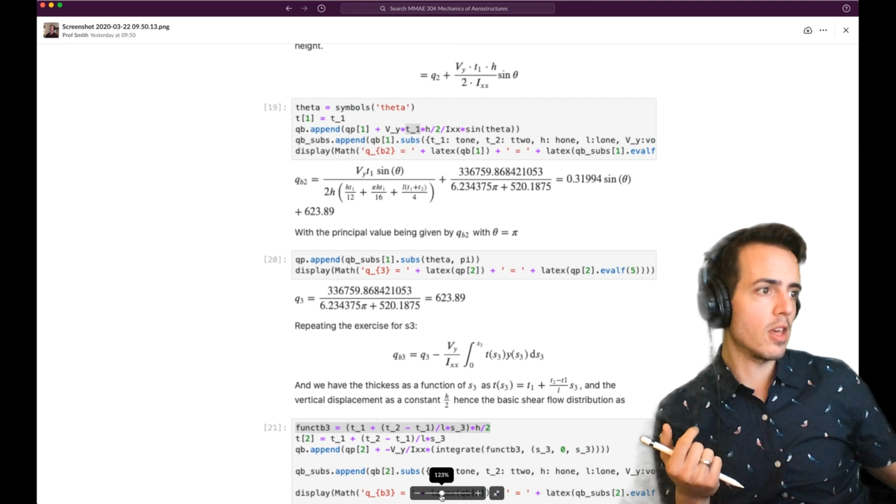Mr. Tilker also asked some questions, and after I suggested where I thought his mistake was, he was able to spot it himself. It's useful to have this online because when someone like Mr. Tilker has a question, it will likely pique the interest of others who didn't realize they had the same issue.

If you haven't joined already, I think we've got 49 people on the Slack site, and I believe only slightly above 50 are enrolled in the course, so that's a really good showing. I thought I'd put up a more professional profile picture, but no, I still have the original one. I'll try to update it occasionally to reflect my state of mind based on the number of emails I get.

Let's go back to the notes now.

Slack's being used really well. Please, if you've got a question, try to put it in there. I've also seen that some students are using it to help each other out and find the videos.

I just saw Mr. White asked a question, so I'll answer it straight away. Going back to Slack - this is where it's useful. His question: for the shear center calculation, when providing the answer to the shear flow distributions, is it okay to leave Q2 as a function of theta instead of a function of S2? I'll reply directly here and start a thread.

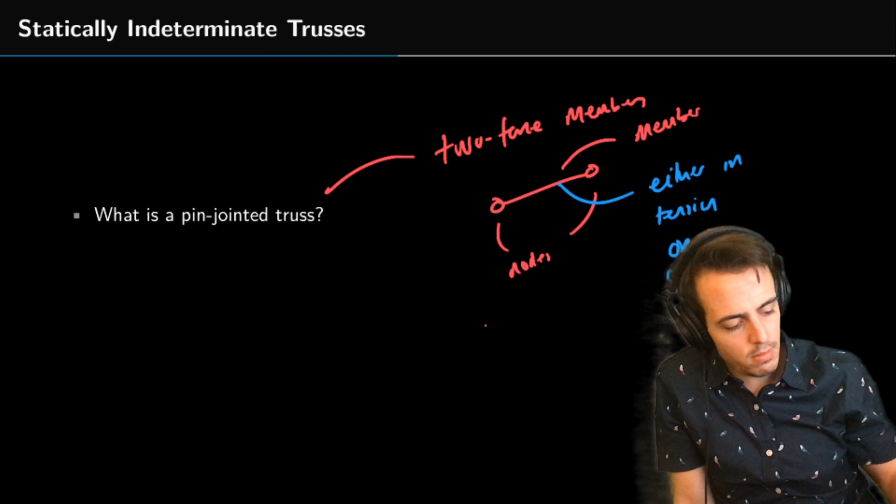So pin jointed trusses are comprising 2 force members. We've got a member between two pins here, or two nodes, and we've got a member between it. Now what this means is this member can only take force along its principal axis - it can either be in tension or compression. The sign convention we use in this course is that tension is positive and compression is negative.

So that's what a pin jointed truss is. Now we've gone through examples of lots of those in class. I'm just going to move myself away off this screen. Actually, no, I'm not going to bother. I'm going to move on.

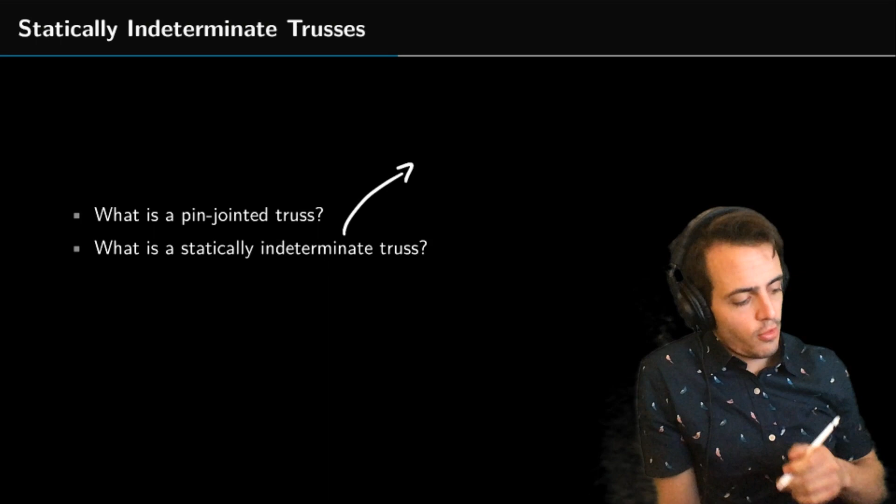So statically indeterminate - what is a statically indeterminate truss? We have a calculation that we do whenever we're looking at a truss frame. We've got three parameters we remember: M, which is the number of members; J, which is the number of joints; and R, which is the number of unknown reactions.

So we can tell immediately that if we've got more than 3 unknown reactions, so if we've got 4 unknown reactions, we can't solve this structure - we can't solve it from static equations on its own. So if R is greater than 3, this is externally statically indeterminate.

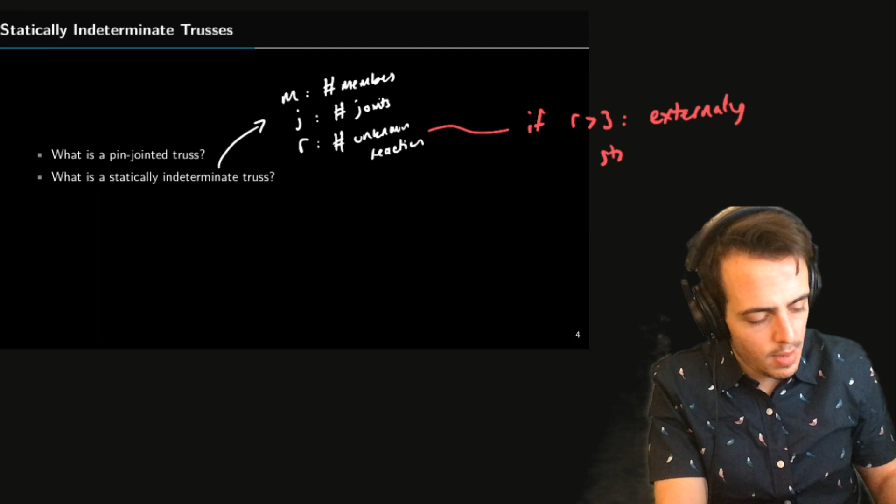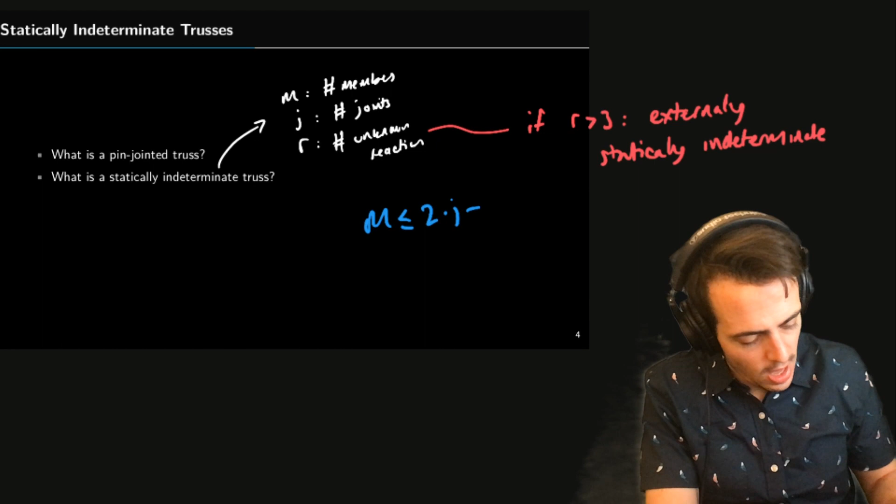Okay, and then if we have R equal to 3 or less, then we can determine whether it is statically indeterminate or not, because we can then look at the equation M is less than or equal to 2 multiplied by J minus R. This is the equation that tells us whether we are statically determinate or not.

So if M is larger than 2J minus R - say if M minus 2J minus R is equal to 1 - then we would have degree of indeterminacy equal to 1. Now this would tell us, in this case, if we'd gone through our truss frame and found out in the first place R was equal to 3, and secondly the degree of indeterminacy was equal to 1, the first step tells us that it's externally determinate.

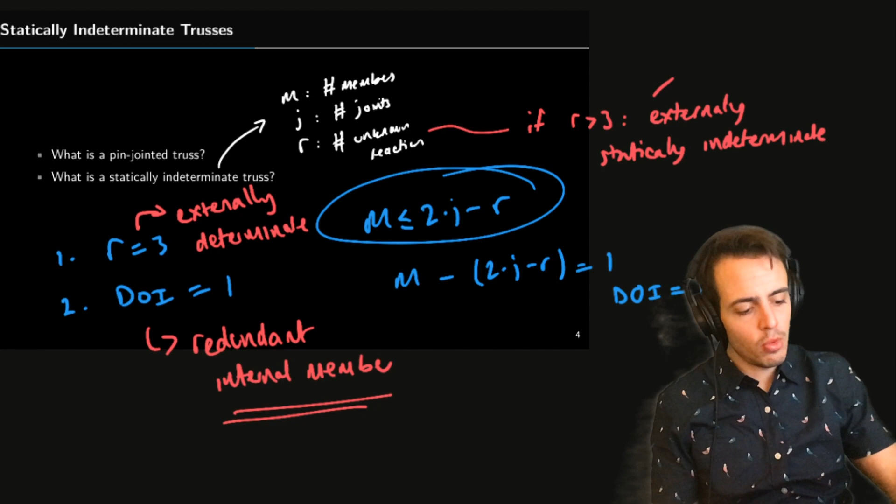And what that tells us is that we could draw a free body diagram and determine what all of the reaction forces are. The second part tells us that there is a redundant internal member. So in either of these cases, we've either got a redundant internal member or we've got a redundant reaction.

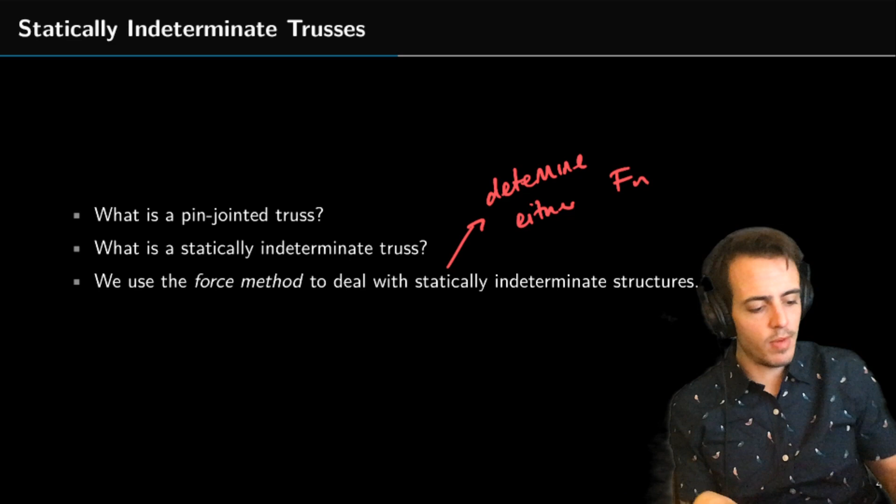Now in both of those cases, we need to use the force method to determine either the force in that member or the redundant reaction, and then we continue with the problem just as we would have done from 200 or 202. So we use the force method with statically indeterminate structures, and this helps us determine either Fn, which is our redundant reaction, or Fi, which is our internal force.

The redundant internal force.

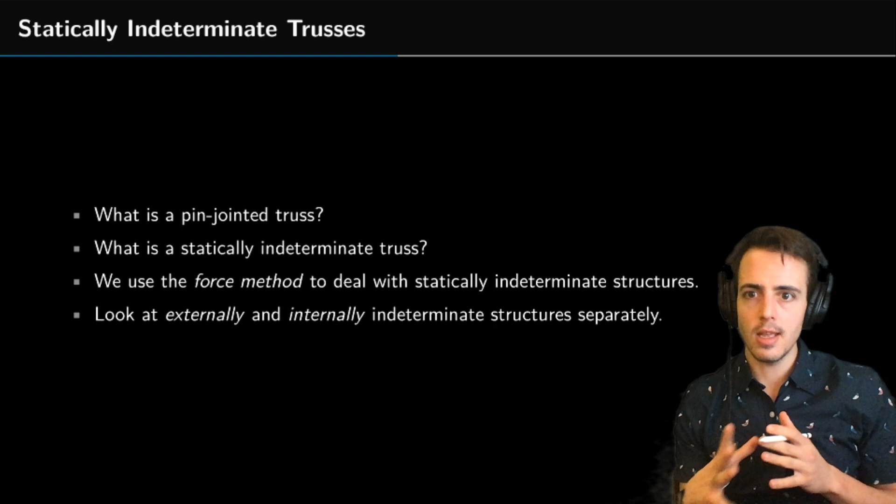We spent a lot of time looking at these two things separately, because even though ultimately we're solving the same problem when looking at an internal or externally statically indeterminate structure, we'll look at these two things separately. It's easier to look at externally indeterminate structures first, so we'll describe what we're doing with the force method. We're not yet looking at work energy, virtual work, or unit work method—just how the force method works. I want you to understand the problem we're trying to solve, and hopefully it will become apparent why using the work energy or virtual work method helps us solve this.

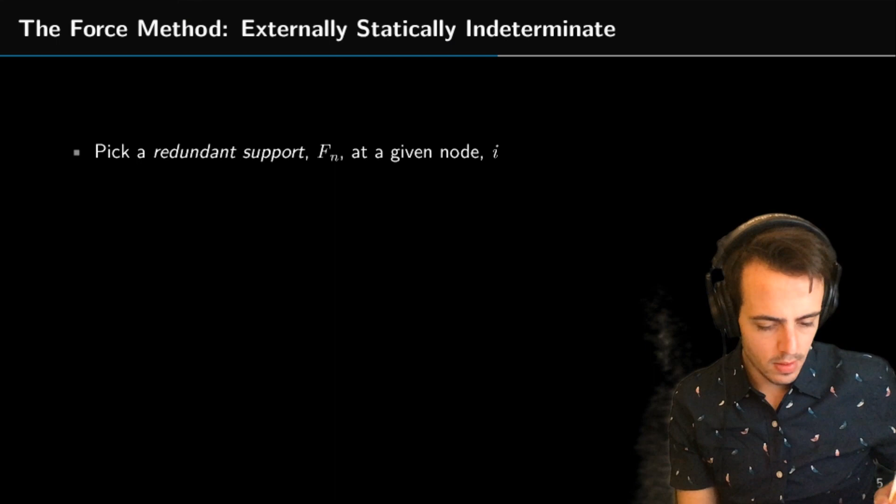So let's pick a problem, one that we've gone through before in class. Say we have this truss structure here. Let's zoom in a little bit, and I'll make this slightly smaller so I'm not going over my text.

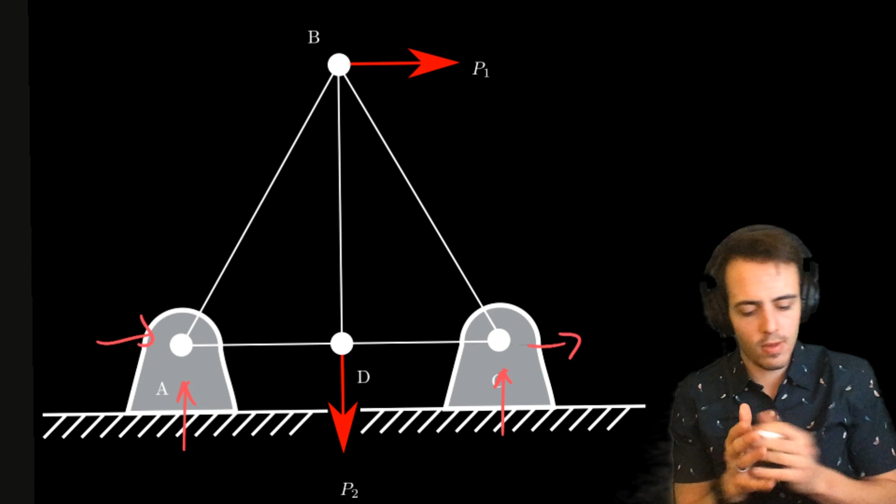Before we follow the steps listed, let's look at this problem and do our calculation. We've got two built-in supports, one down here and one over here, both of which have two reactions. So I've got RAX and RAY, and RCX and RCY.

That tells me I've got 4 unknown reactions already. R is equal to 4, therefore we are externally statically indeterminate.

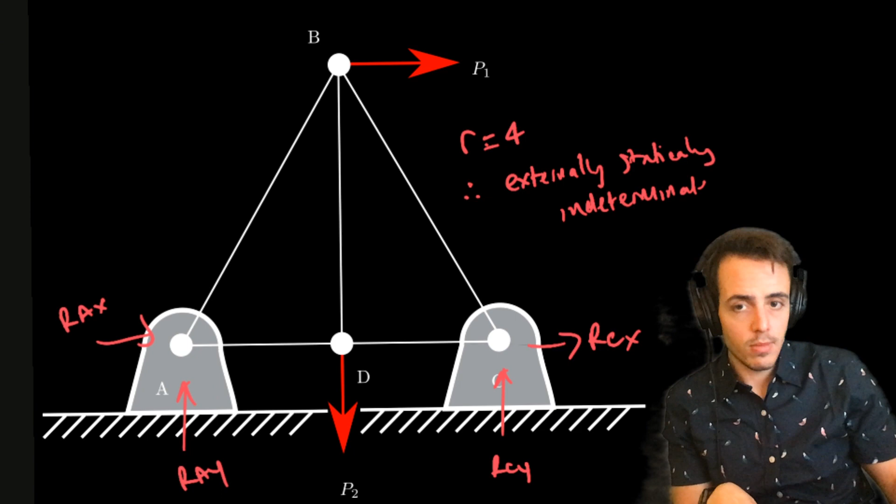Now we can also check the degree of indeterminacy of this structure. If it's 1, that's good, because we know we have a single redundant reaction, telling us we don't need to get rid of any internal members. If it's greater than 1, that would tell us that in addition to removing one reaction, we'd also have to get rid of an internal support.

Okay, so Mr. White has just thanked me—that was a nice noise in my ear. He said not just thank you, but 'awesome, thanks.' So it's good to know. I'm not making fun of you, Henry, it's just very weird speaking into a camera and seeing student responses as I'm going on.

Anyway, back to this problem. We can work out what else we've got here in terms of members: 1, 2, 3, 4, 5 members, so M is equal to 5. And looking at the number of joints, we've got 1, 2, 3, 4 joints, so J is equal to 4.

So our equation: M has got to be less than or equal to 2J minus R. That is 5 is less than or equal to 8 minus 4, so 5 is less than or equal to 4. We can see here that equation is off by 1, so our degree of indeterminacy is 1 for this structure.

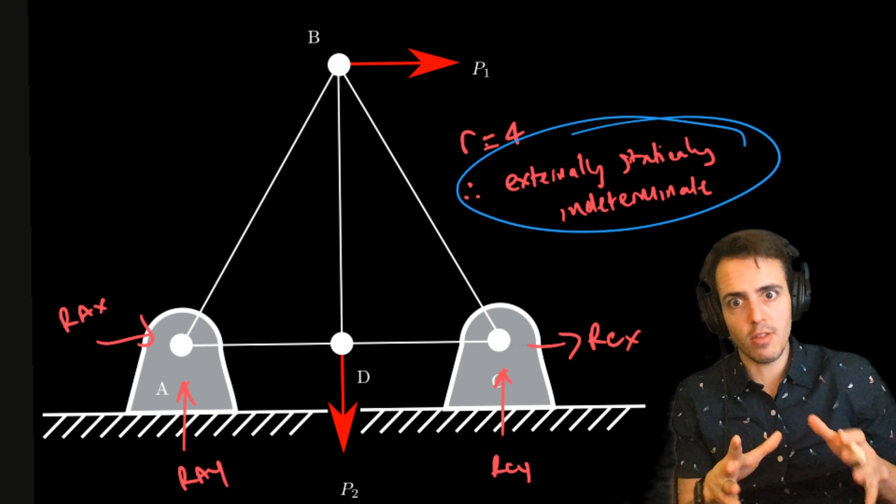We can see that for this structure, if we've got 4, we can't determine what each of those reactions is based upon the static equilibrium equations. So it means one of them is redundant, and if we get rid of it, we could still have a structure maintaining equilibrium without it.

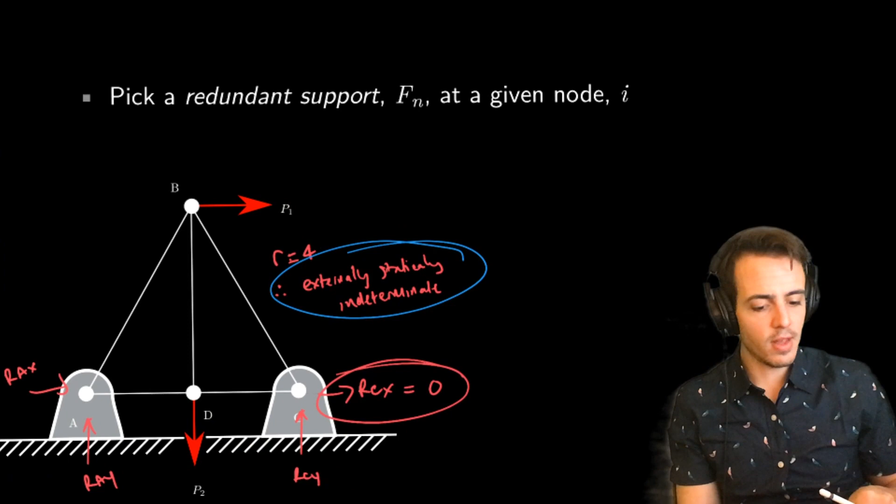Just for the sake of this question, and because I've drawn all the diagrams already, we'll get rid of RCX—we'll set this one equal to 0 first. This is effectively what I'm being asked: pick a redundant support Fn at a given node i. So the ith node in this case, i was equal to C, and I've chosen Fx. So what I'm getting rid of is Fcx in this case—I'm setting that to be my redundant reaction.

So then we're now going to see how much the structure moves if I set that equal to 0. And this is going to give me the quantity big delta I. So let's introduce the next diagram.

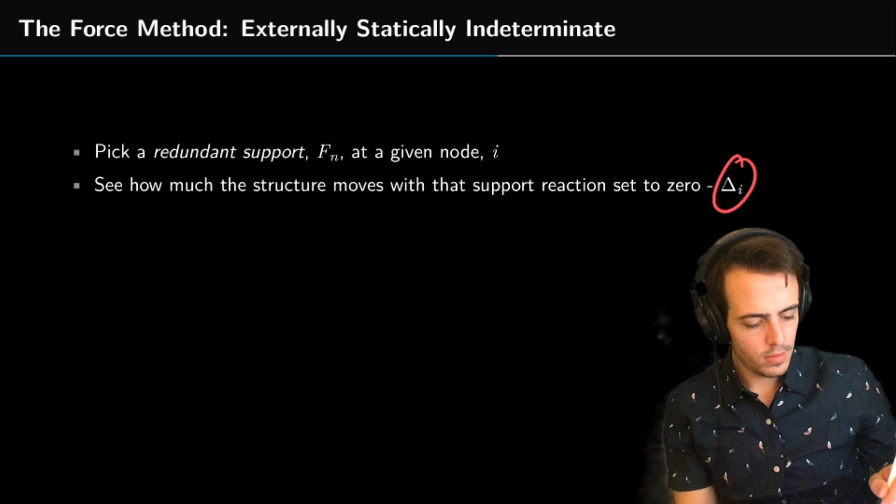Okay, so if I set that reaction equal to 0, what I have effectively done then is I have taken this structure, and I've taken what was a built-in support, and I've turned it into a roller.

I've got to figure out how to get a decent black background on these slides, or get my LaTeX slides to match the background of this other program, because that's annoying how there's that line there. I'll try and get that fixed.

So we've turned our built-in support into a roller now, and this means that if we apply these two forces here, pulling down and pulling across, the structure's probably going to move in this direction. So we're seeing how much the structure moves with that support reaction set to 0.

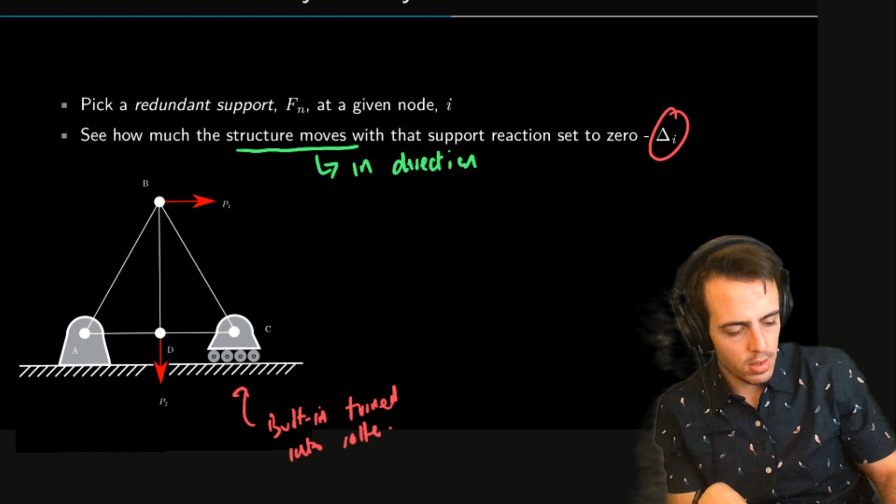There's an important distinction to make here. We're seeing how much the structure moves in the direction that that reaction was.

I'm not telling you how to do that yet. We're going to go through that in the coming lectures. I'm just telling you the distinction in the force method. So let's put our next one in.

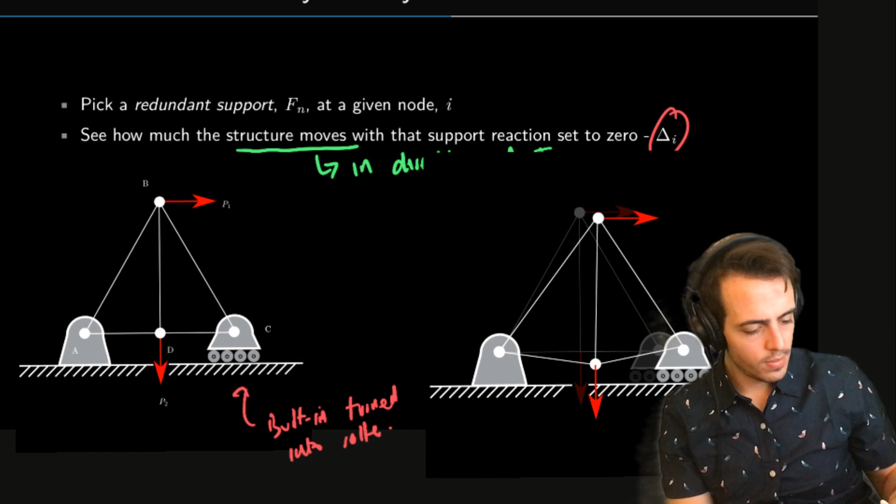So if we then load our structure, we can see that it's moved a certain amount. I've got the original structure in the light grey, and I've got the new structure in the white.

I think my wife's getting phone calls in the background and doing her very best to not answer them.

Bless her. So we've loaded the structure. Now we remember that our reaction that I put over here, this was Fcx, was equal to 0.

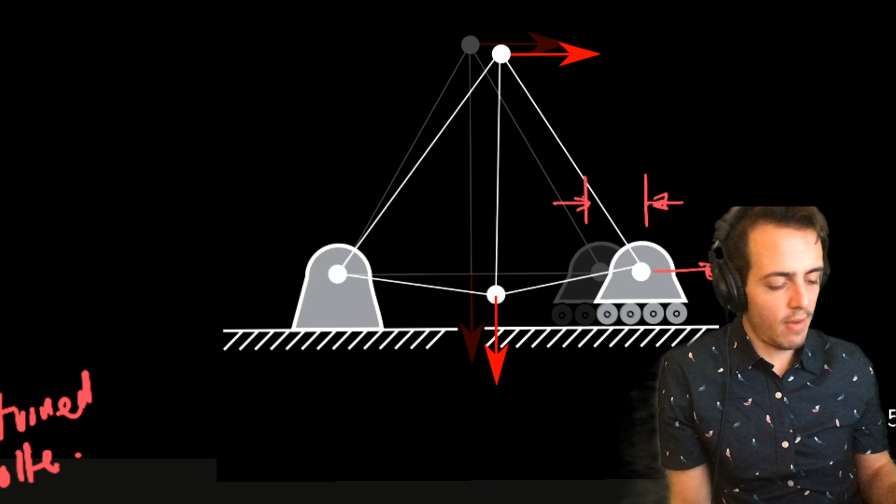So the distance we're trying to look at now is the distance this would move parallel to Fcx. So this distance in here is delta I in this case. I could call it delta Ix if I wanted to. I'm only ever looking in one direction here, so that's the displacement that I'm looking for.

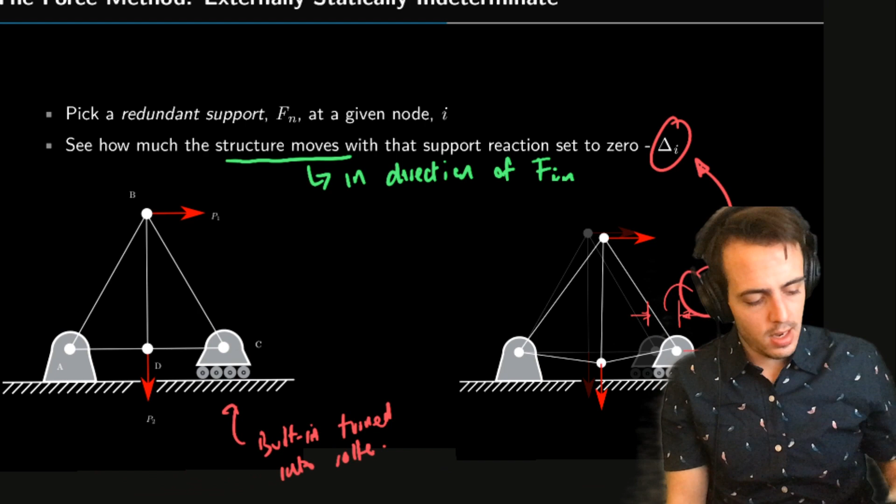I'm not telling you how to solve that yet. We can solve it using either the geometric method, or we can solve it using work energy equivalence, or ultimately we're going to have to use the principle of virtual work. Actually, for this structure we don't need to use virtual work, but I'm just trying to give you an overview of what the force method does. So we're seeing how much the structure moves, we've got this displacement here, and that helps us. So let's put our structure back.

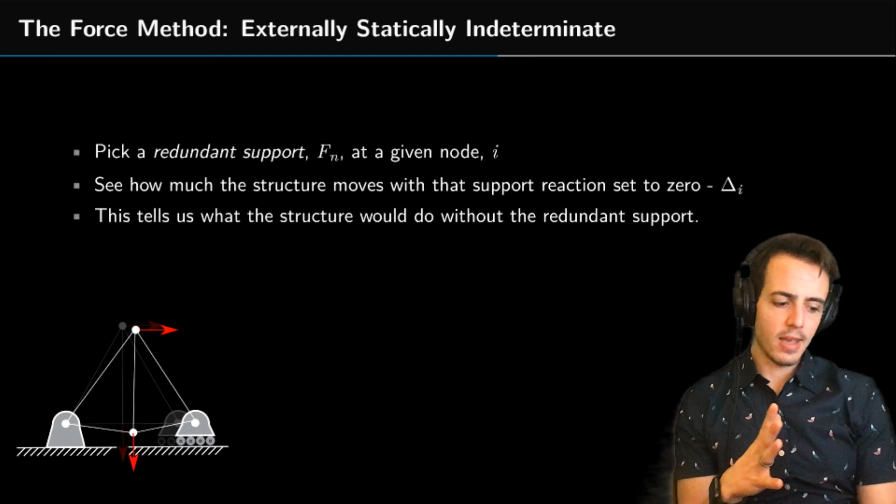Okay, so this tells us what the structure would do without this redundant support force being there. If that redundant support force wasn't there, the structure would displace to the right by this certain amount, which we've called delta I here. That amount is how much the structure would move were that redundant support not there.

So we can think about what that support is doing. That support is maintaining static equilibrium of that node. So Fcx, which I'm drawing going from left to right here, is probably going from right to left. It's probably a force pushing the structure back in the other direction, because we would ultimately end up showing that the structure, node C, moves from left to right on screen. So the force needs to be going in the other direction, but that would just give me a minus number in this case.

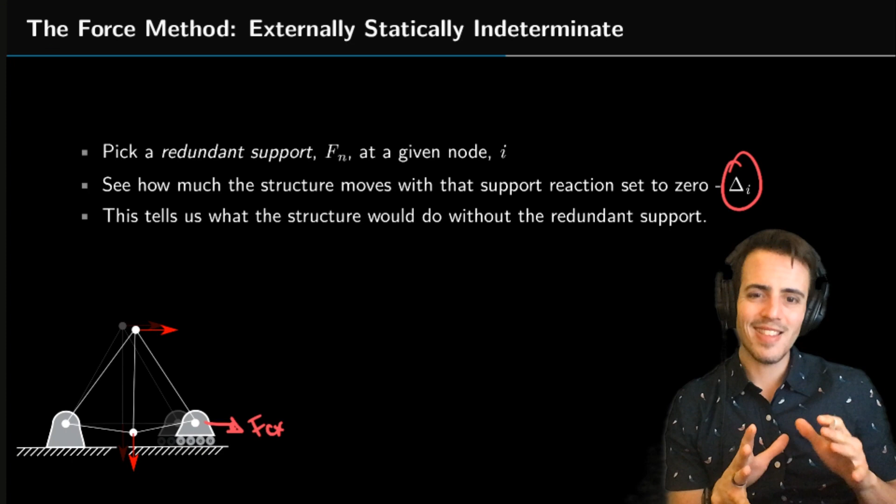So without that redundant support, the structure moves in that direction. That tells us that the force that must exist at FCX is just enough to maintain static equilibrium, just enough such that when that reaction's there, there's zero movement of that node in the horizontal direction.

So we don't know what that force actually is yet. Let's move down a little bit. So we don't know what that force actually is, so we just set it to an arbitrary value. I've called this Fn1 in this case, and we can just set this equal to 1 Newton. And we want to see how much the structure would move back in the other direction.

Okay, and it's important how much the structure moves when we're looking at it with this method, in the absence of all other forces. So we don't have those P1 and P2 on our structure anymore. So let's just move me back because I like having some screen space so I can point out things.

And let's move one of our images on here. So we take our structure and we can see here that I've gotten rid of my P1 and P2. I've no longer got P1 and P2, which were applied at these nodes here, and I'm just applying a single force here. So what we would need to do now in this case is work out what our reactions are.

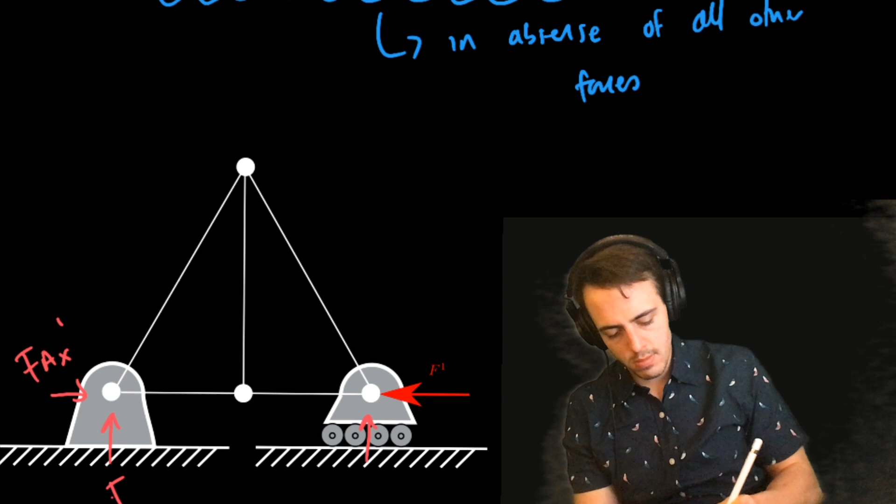Work out what those reactions are, then work out what all of the internal forces are. So we'll call this F1 prime, F2 prime, F3 prime, if this was our numbering system in this case. And then we'd work out effectively from all of those, whatever method we end up using, you could, for this structure here, just work out what the displacement of these two members are.

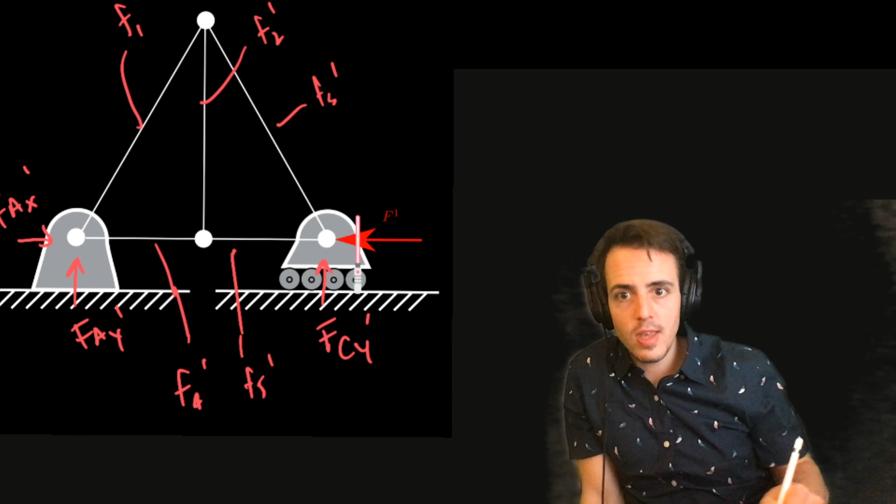So we call this F4 prime and F5 prime. If we had those, we could look at the contraction of those two lengths and then determine what the movement of node C is. But we're not really trying to solve this problem, we're just trying to describe the method.

Let me bring my last image of this one in. We then see how much the structure would move back in the other direction in the absence of those other forces. So then we've got this new displacement in here.

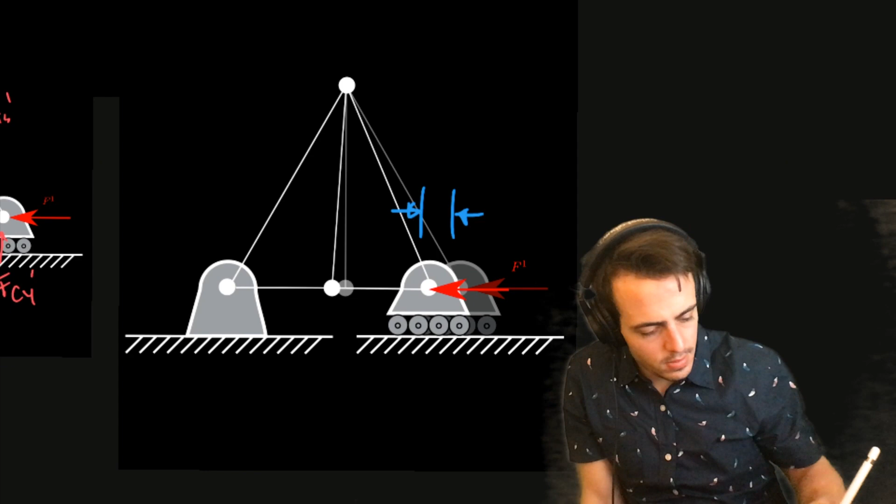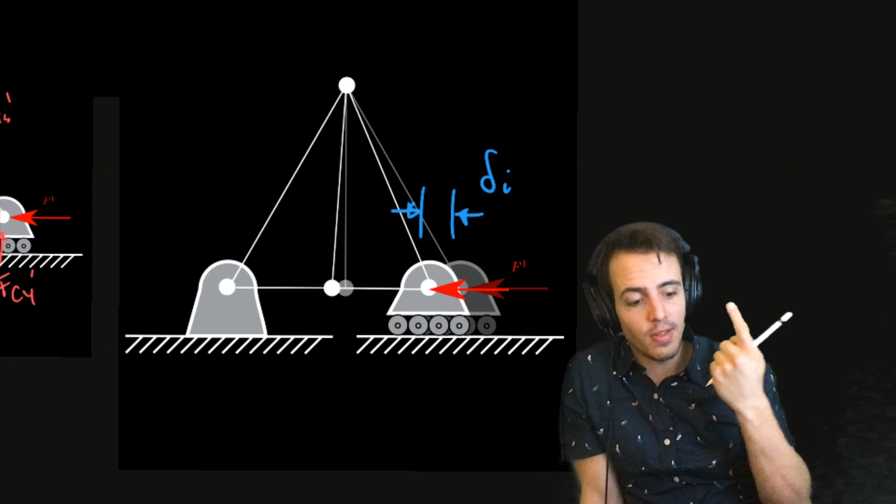I call this delta I, okay? So this is now the displacement of the structure that would move back with a reaction of 1. In this case, we've got our little delta in here, and now this should be a lot smaller for any sensible loading than the big delta, okay? So that makes sense, big delta's big, little delta's little.

So we've got our two numbers now, and once we've got those two values for a linearly elastic structure, then we know that actually that condition to give us zero displacement is when our reaction support, Fn, the bit that we're trying to find, is equal to the big displacement divided by the little displacement. Okay, so that's going to help us determine what the actual unknown reaction is for our problem.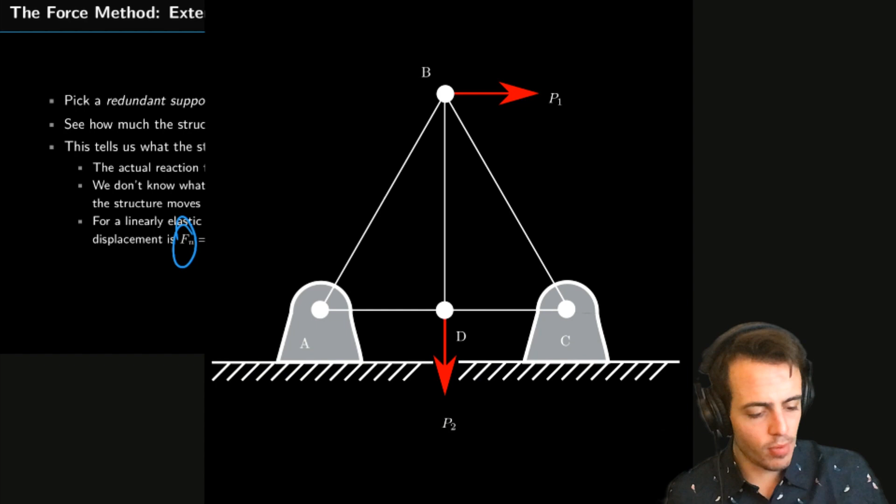Once we've got the unknown reaction, we then just apply it as a known loading. So let's go back to our structure here. So we would then start again at this problem. We've then solved for this Fn.

We've solved it, which is good. And we would then end up having this force. Now it would obviously be a force going from right to left for this problem. So I then have on here, this would be Fcx. And this would just be a number, an input into this problem.

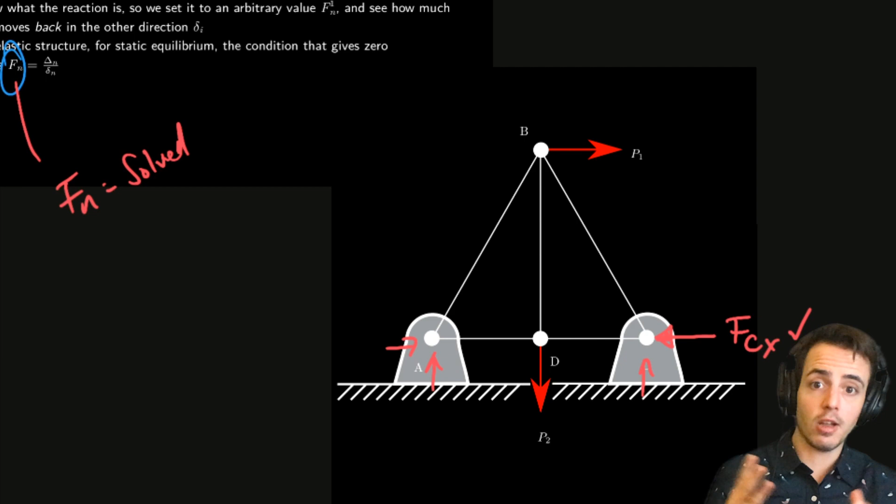So I then got P2, Fcx, and up at the top I've got P1. I've got 3 inputs, so this I would put a tick next to it because it's known. I would then still have my 3 other reactions which I could solve for, and I could solve for these from the basic static equilibrium equations.

So from this problem now, okay, so from this problem, so one second guys, sorry, love, what was that? Thank you. Okay.

So with those things all known, we could then solve for the internal forces in this structure. So we started out with a structure that had one too many external reaction forces, and we then used the force method, or we spoke about using the force method, to solve for the unknown reaction.

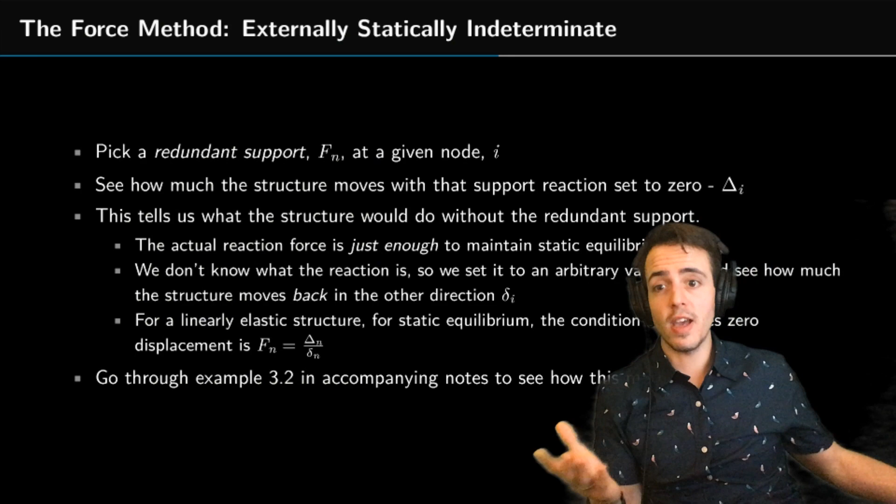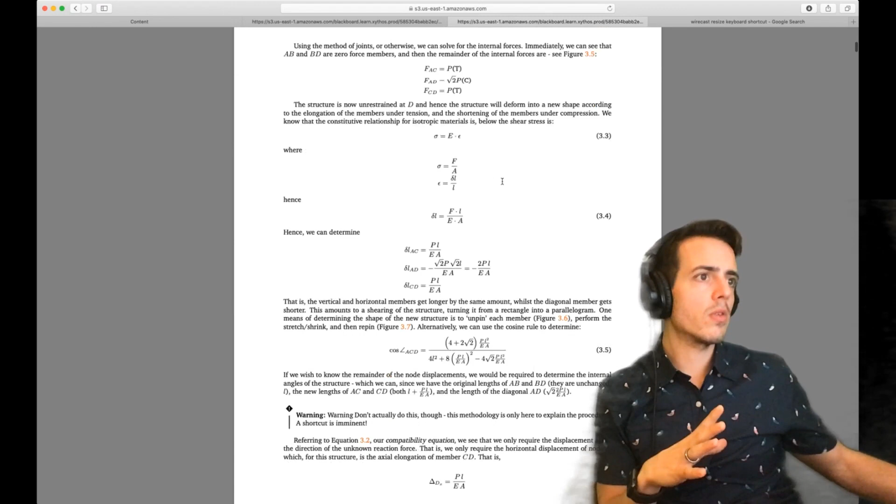Here we go. So example 3.2 in the notes. I spent a long time writing these guys. They're pretty useful, I think. So example 3.2 is, here we go, an externally indeterminate truss. Where do I have an image of it?

Okay, let's try and find it. Here we go. So for this problem here, we can see that we've got two built-ins.

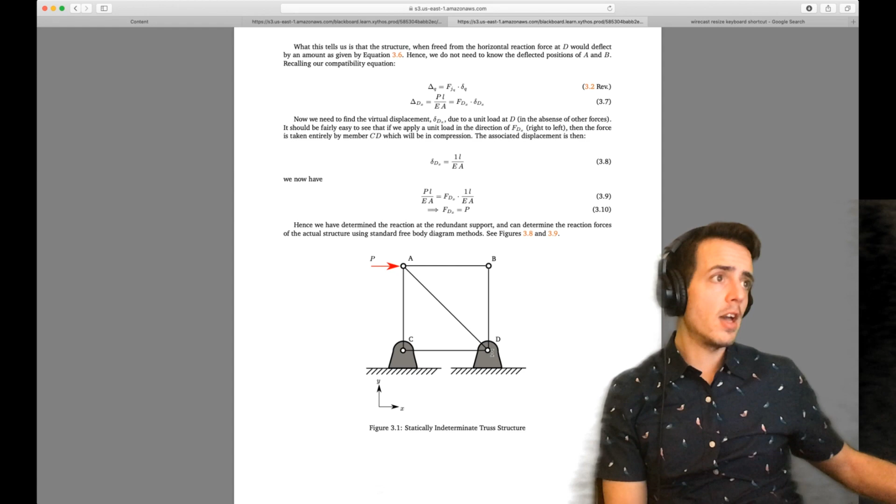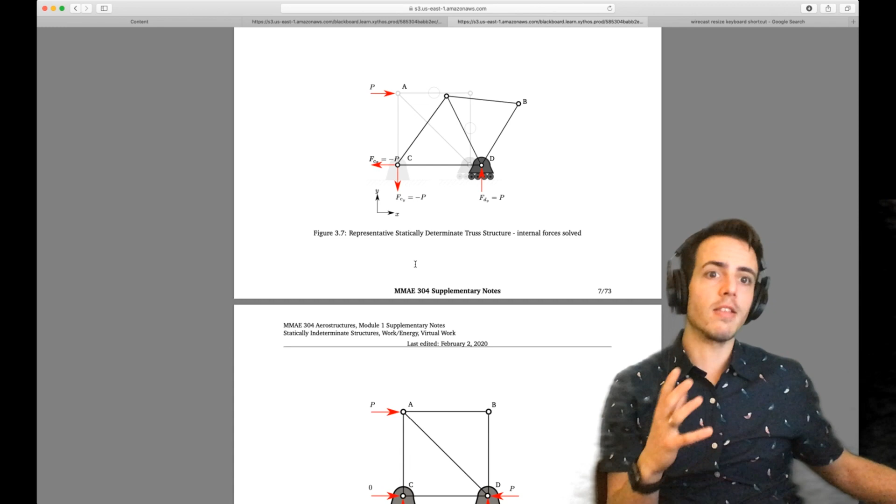So we've got 4 reaction forces, and we can go through and solve for the total internal forces of this structure. I end up using a geometric method with this problem. You guys know I don't think that's the best method to solve these structures by, but I'm just showing you what the force method is and how it's completely independent of everything we've learned in terms of using work energy, virtual work, and so on. Please make sure you can go through this problem and understand it in full.

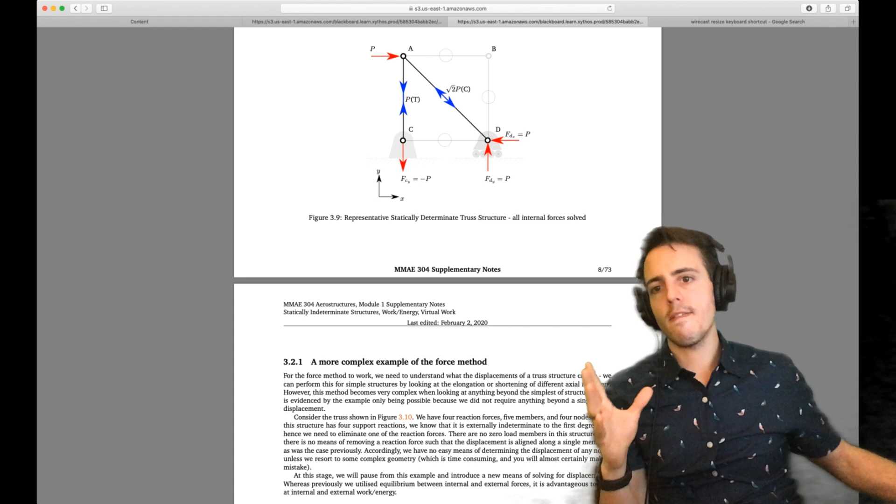Once we'd finished looking at the simple examples with this structure, we then said, what if we have a more complicated example now? What if we got something like this? Ultimately, this hasn't got really a tremendous amount more in it. Let's have a look - it's actually the same sort of problem as the simple one we went through. It's got the same degree of indeterminacy. We've just got a structure that is geometrically a lot more complicated.

So the same procedure we would follow to solve for this - we went through it in class, and I fully go through it in the notes - how we'd solve this problem using the force method and using work energy equivalence.

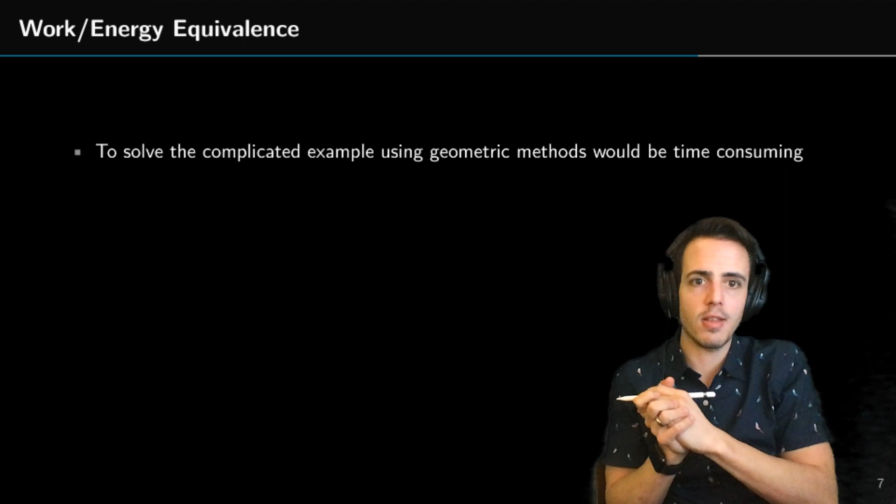So what is this work energy equivalence? We spoke about it quite a bit already in class. Just to recap and go back through all of this: to solve for the more complicated examples using the geometric method, where we try to unpin and then reconnect all these joints together, it would be time consuming, and I'd make mistakes doing it. I expect most of you guys would make mistakes doing it as well. So we utilize this concept of work energy equivalence.

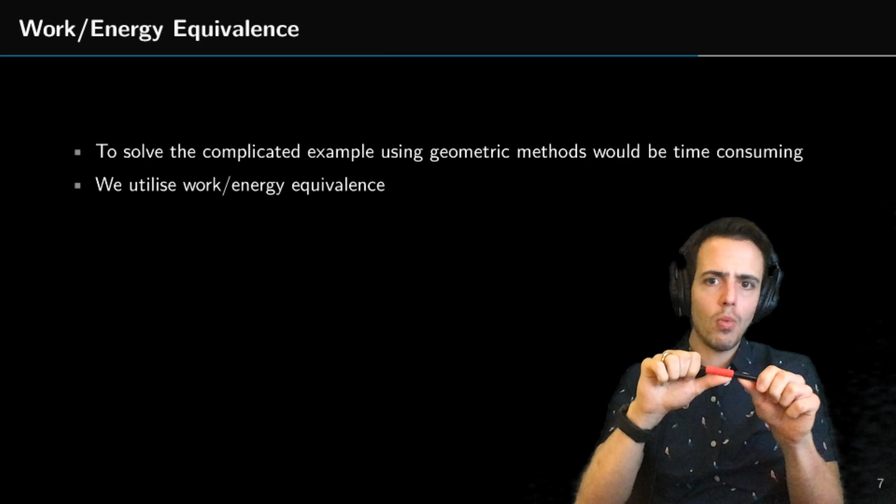Now, it's a really powerful means to think about structures. When we're thinking in terms of forces and displacements, this can be tremendously complicated because forces and displacements themselves are both vector quantities - they've got a magnitude and a direction, so we have to be careful about the way we add them together. Work and energy, on the other hand, are just joules. They are scalar sums. So we can think about, if I want to bend something, I'm doing work to the structure and I'm storing internal energy.

When I was looking around on my desk for something to pick up and bend, I managed to find this phone holster. This is actually bright green in reality, so I think it just shows up as black on here. That's kind of cool.

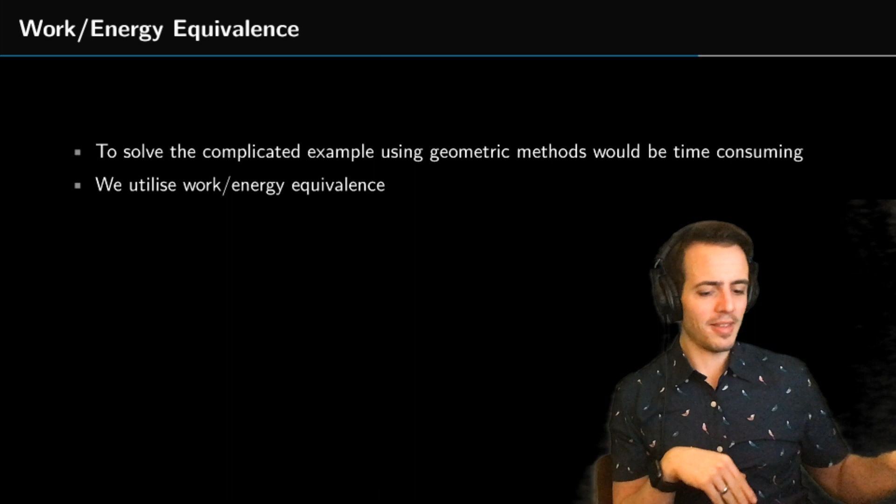Okay, I'm entertained by simple things, but we use this work energy equivalence to determine the relationship between the work that we put into a structure and how that's stored internally in the structure. We can just remember that energy itself, in joules, is just the ability to do work, so it's stored work.

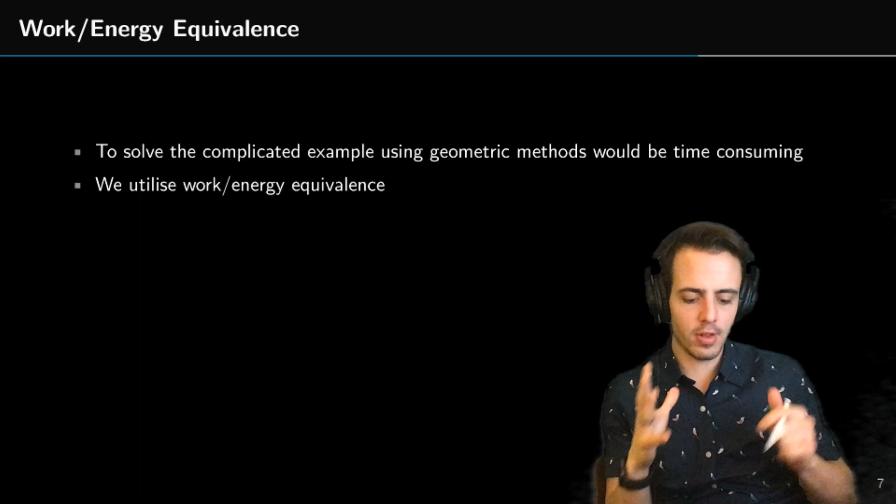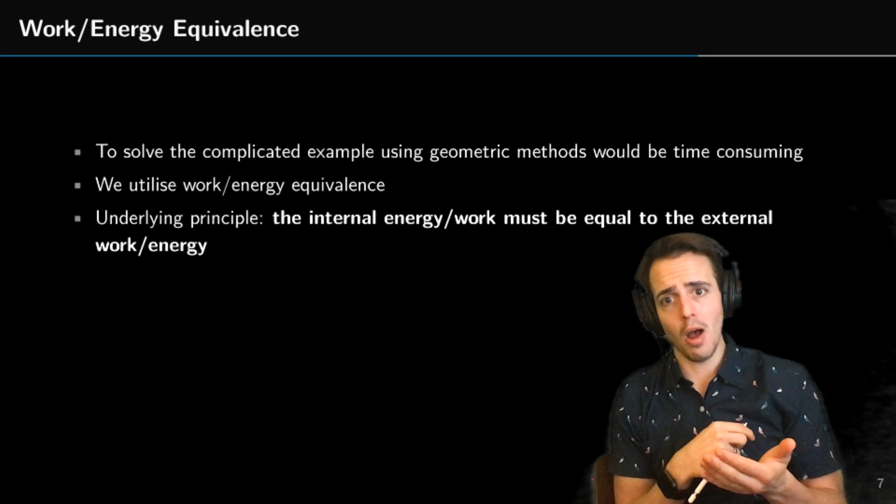The fundamental thing for this problem is that the internal energy or work must be equal to the external work or energy. I've split those two and changed the order of work energy there on purpose, because we tend to think about internal energy, i.e. spring energy - we think about potential energy. And we tend to think about external work because we've done a force and a displacement, and that's the definition of work. But these two things are always equivalent. Energy is just the ability to do work, or stored work in this case. So that's our governing equation: the sum of the internal energy has got to be equal to the sum of the external energy.

We've then got the definitions of these - we went through this in class. Internal energy stored within each member is equal to half the internal force in that member multiplied by however much that member extends by. So let's just line these up.

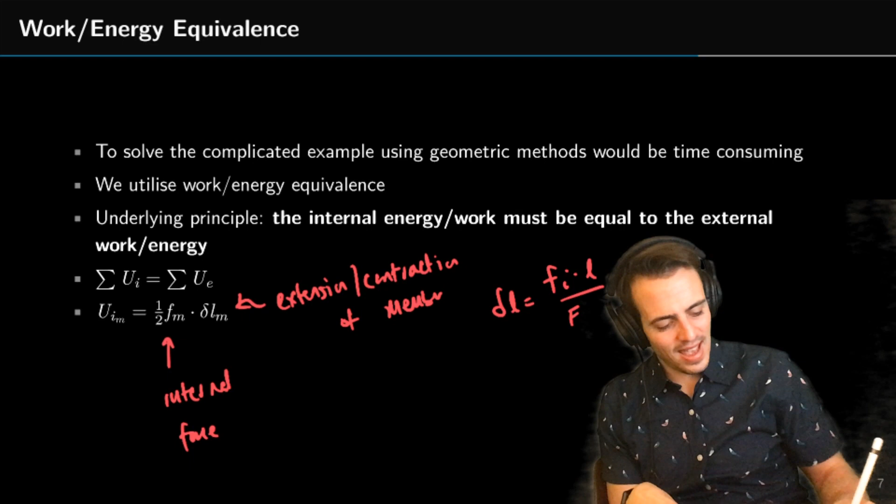Started to write that wrong - I'm having some trouble doing this from memory here. F i times L over E times A. So if we're looking for the extension of member i, we take the force that's present in it, multiply it by the length of that member, and divide it by both the Young's modulus and the cross-sectional area of that member.

If we're looking at the external energy, then it's very similar. We look at the displacement - how much that node moves by in the direction of the force that's being applied. Now the important thing to note here is these two have to be collinear. So if we're applying a force in the x direction, we're then looking at the direction the node moves in the x direction. These two will always be collinear.

And that's because if we have a two force member like this, if I've got tension, that has to exist along the principal axis of my two force member, and so does the extension. If I've got contraction, again that force has to exist along the principal axis of my two force member, as does the compressive force present within that member. If I've got a node here, and I'm applying a force in this direction on my node, I've got to be careful that the displacement I'm looking at is aligned with the force I'm applying. So we're just careful when we look at these two.

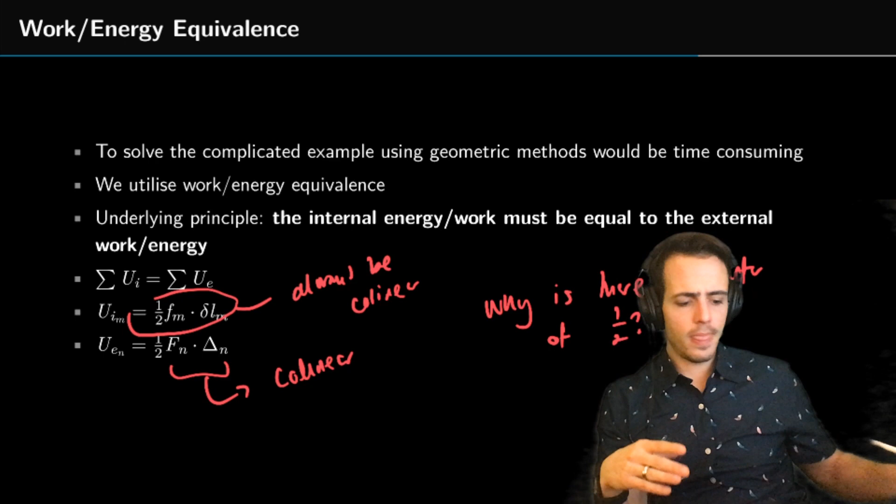Why is there a factor of a half in those? This is where I'm asking a question I probably should be answering, but we've got to remember that we're looking at the energy stored as the area under the stress strain graph. There's a big section of this in the notes, so let's go through it, directing you to more reading here.

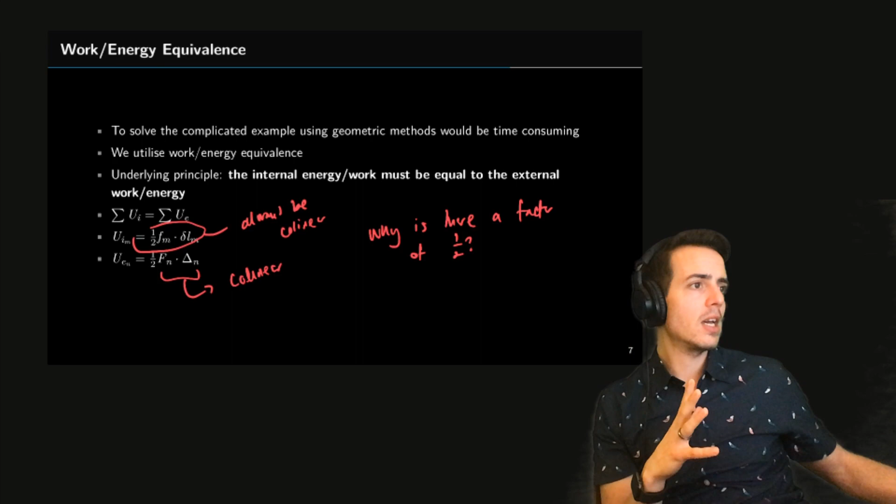Okay, so back into the notes here. We're thinking about internal energy. Here we go, virtual work I talk about. I don't want to talk about virtual work yet, I want to look at this first. Here we go, okay? So we can look here.

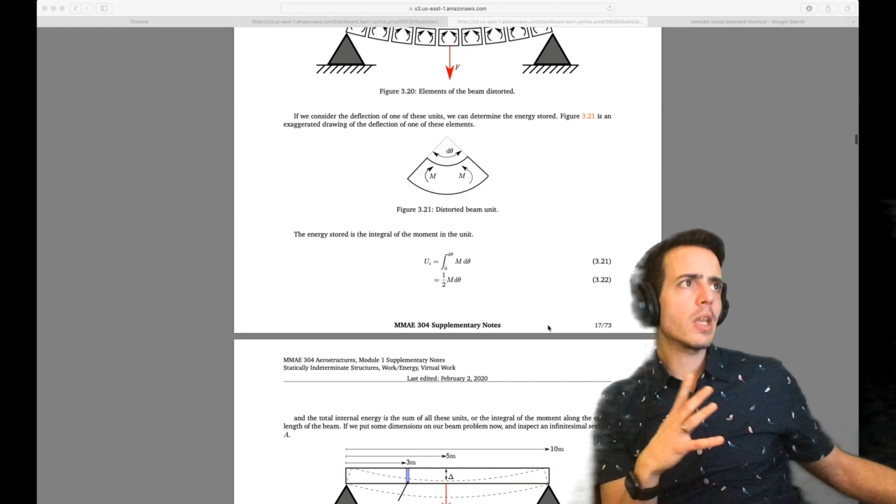So if we look at these sections here, go read through and we can understand what these internal forces are and where actually this energy is stored and why there's a factor of a half in this case. So we're looking here, I talk about applying load sequentially over time, and this shows effectively how we're looking at the area under the load displacement graph, or the stress strain graph if you want.

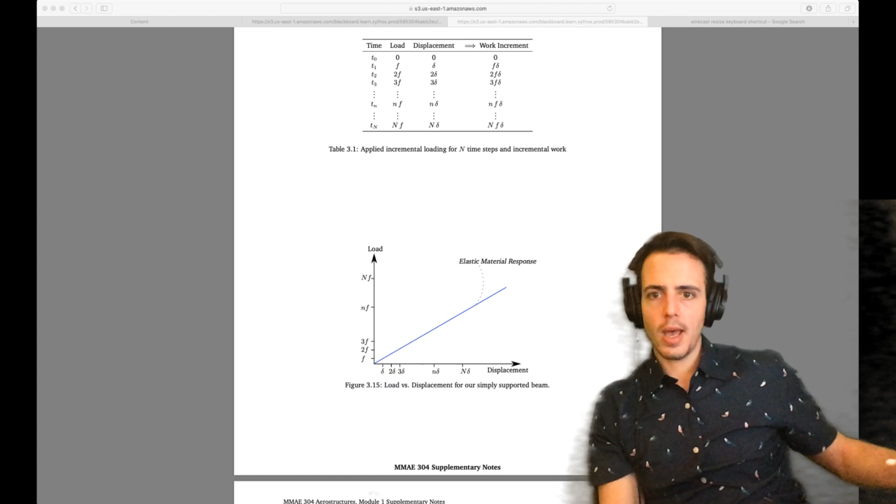Let's go back to my blackboard. Again, there's another example. Go through section 3.3.2.2 - you can tell how wonderfully organised my notes are there. Let me find it. Okay, 3.3.2.2, we've got a simple structure here.

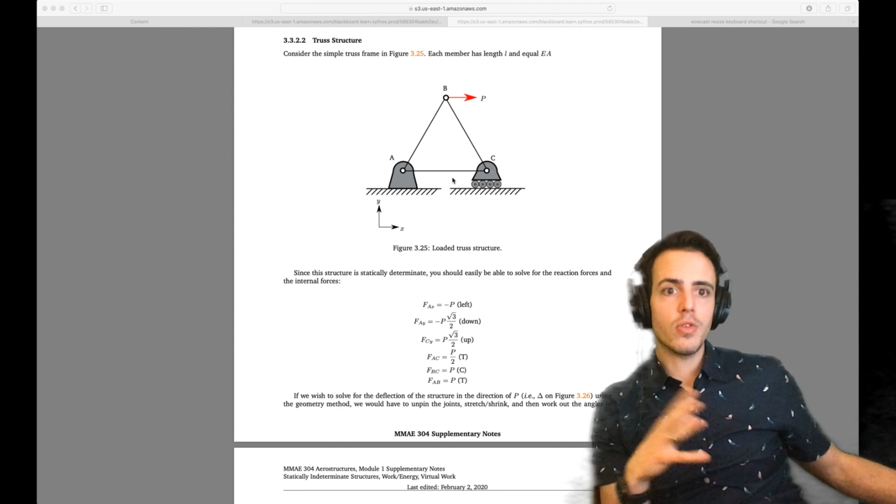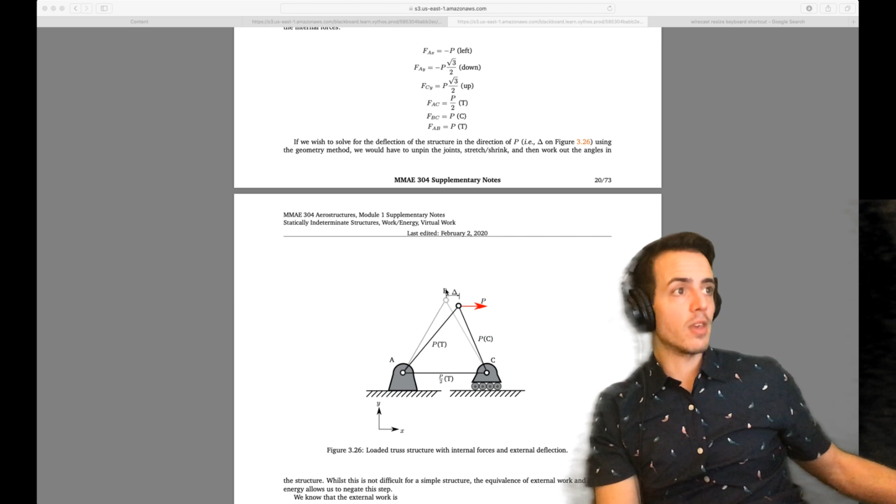We're able to, for a structure just like this, we've got a single applied force, which means we've got one force to look at in terms of the external work done, and then we've got three members to look at the internal energy. We can equate those two directly because there's only one unknown in this case, which is the external work, which for this one is going to be this delta B here. So make sure you can follow that example through.

This is just going through and understanding what the work energy method is. Now, when we go to look at this structure, again, we can't solve it yet using just our knowledge of work energy, so we have to invent this virtual work. Virtual work, I've said in class before, I think it's such a powerful concept of solid mechanics. It's one of the most powerful tools available to us.

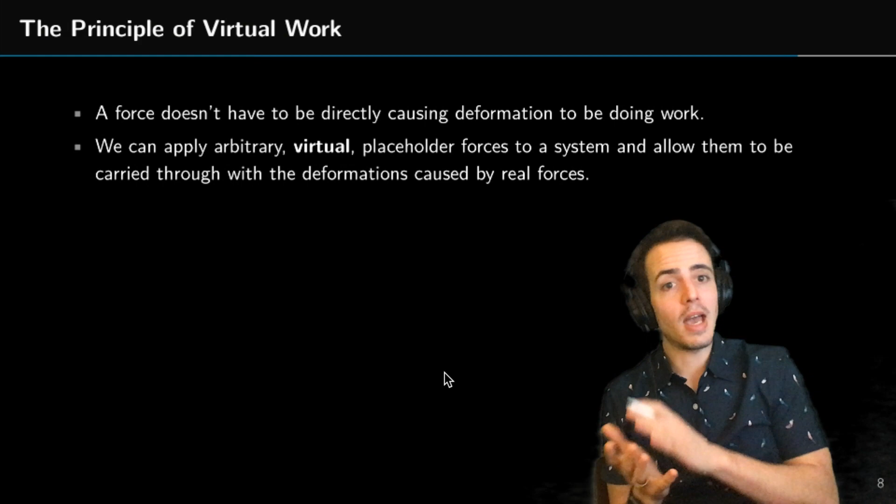It's such a startling observation that someone once made, and the key thing is that this force doesn't have to actually cause the displacement to be doing any work. So this means that we can take a structure and apply whatever forces we want, and as long as they are small and we put them there prior to any other loadings taking place, they can just be carried through with any real deformations.

So let's draw a really complicated truss structure. Horribly not organized truss structure. Say I've got a very complex structure here - pretend that it looked nice when I drew it. And say, for example, I wanted to know the displacement of this node here. That's what I want to know.

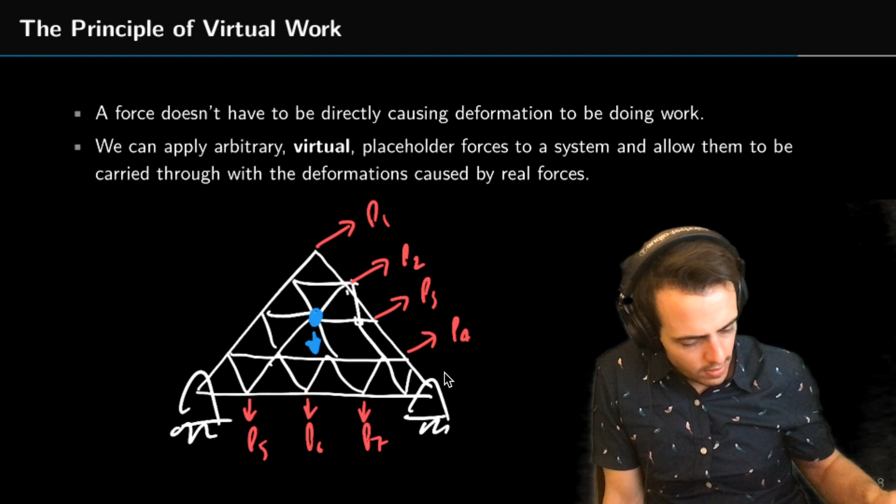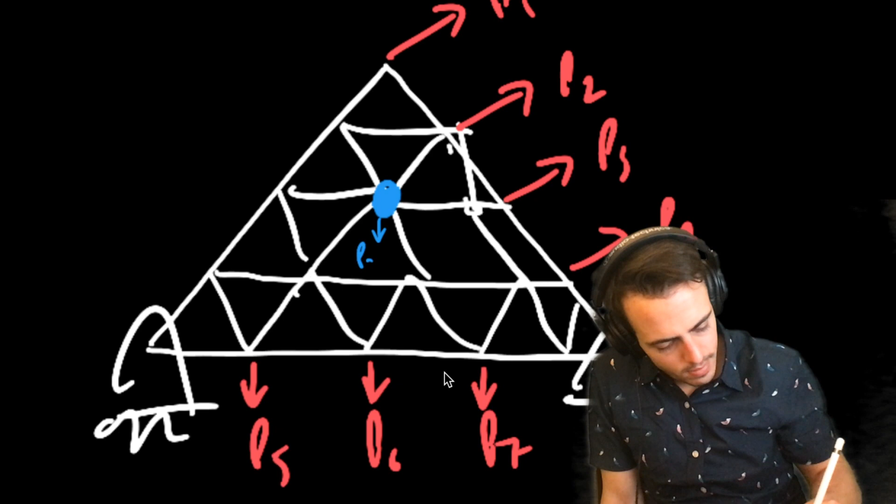And I've got a bunch of loadings on here, say it's being pulled up, P1, P2, P3, P4, P5, P6, and P7. If I want to know what's going on at this node in the center, all I need to do is apply a virtual force, which I'll call P8. Let's zoom in a bit so I can write that on there properly. I can apply a virtual force there. So I've got a bunch of real forces and some virtual forces now.

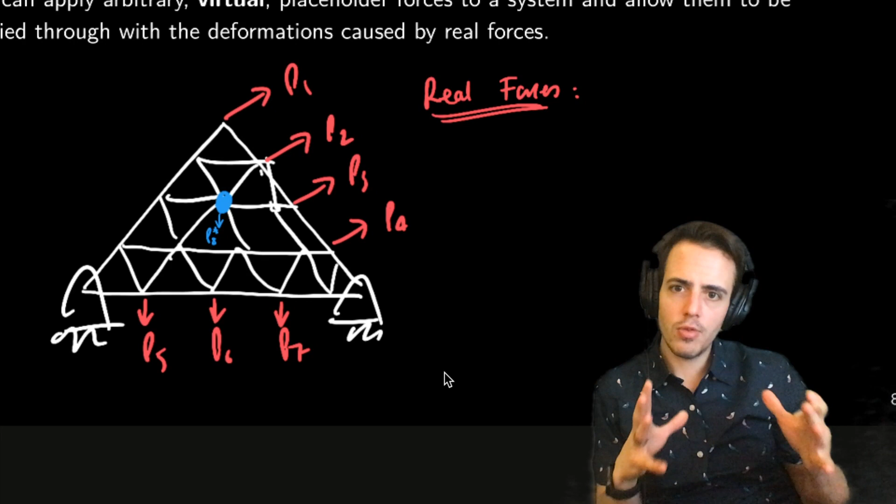So we've got a couple of systems in place here. We've got real forces. Now what do these create? These create real reactions, and then real internal forces, and real extensions.

So let's give these the symbols. This would then give us my real reaction vector, which for this built-in structure would actually be 4 - I'd have 4 reactions. I'd then get my real internal forces, lowercase f would be a vector, and then I get my real extensions, this would be delta L as a vector in this case. I've then got a second system - I've got my virtual system.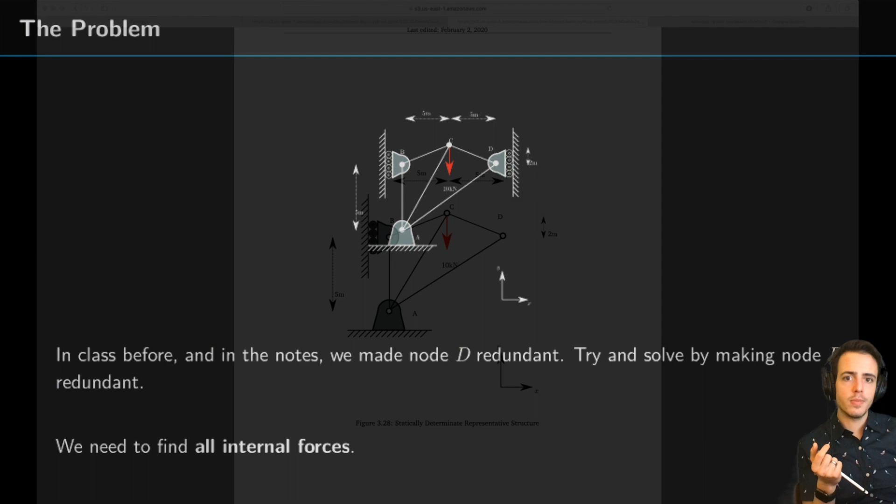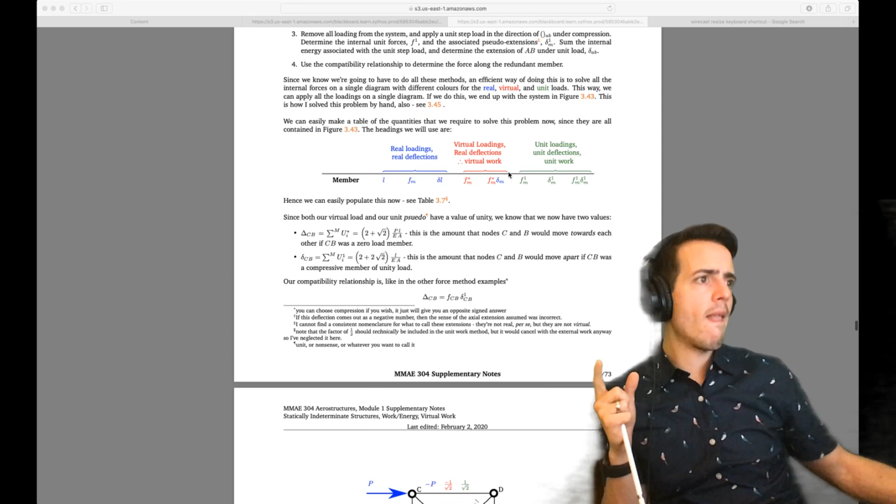Okay, so we've got this problem in the notes completely. I've gone through and removed the force at node D, and solved for the internal forces. Now, do I go through it? Do I do any more? I think it's maybe in the appendix here. Yeah, okay, so we've got all of the internal forces solved for this structure.

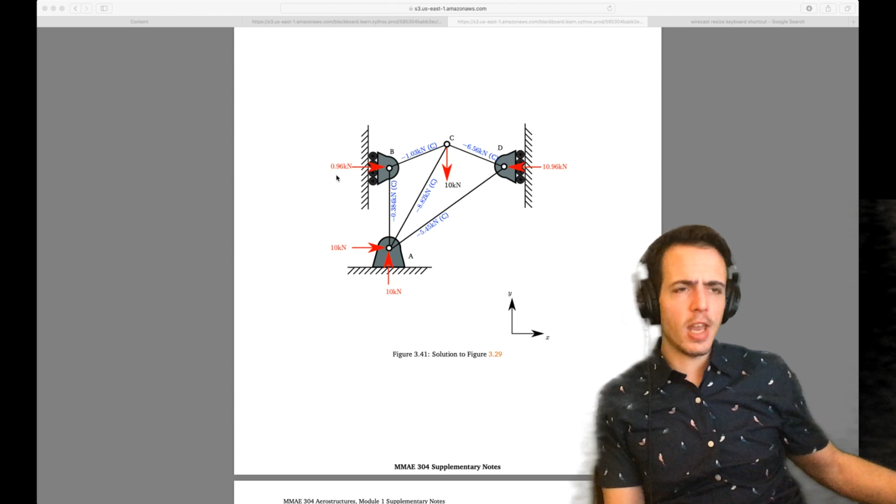Now, what I'd like you to do, and what I'm going to provide a video solution for, but again you need to do this on your own, is take the structure, don't get rid of node D. Make FBX equal to 0, and then solve for the structure again, and you should get all of the same answers. This will show that you understand the problem and can solve problems in slightly different means.

Okay, so I want you to go through this and solve for all of the internal forces. So let me make myself big. Okay, so hopefully that's given a good review of all of the stuff that we covered in the couple of weeks leading up to spring break.